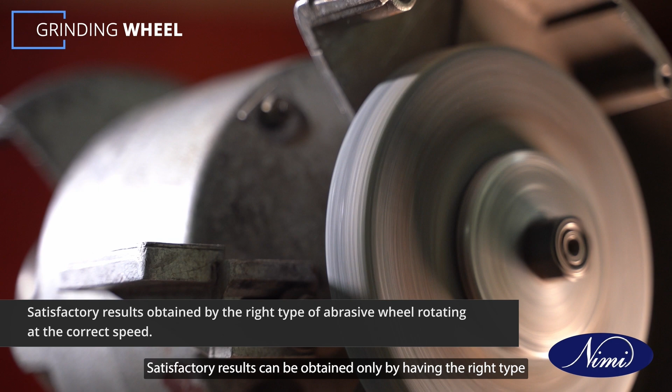Satisfactory results can be obtained only by having the right type of abrasive wheel rotating at the correct speed for the kind of work that is to be ground.

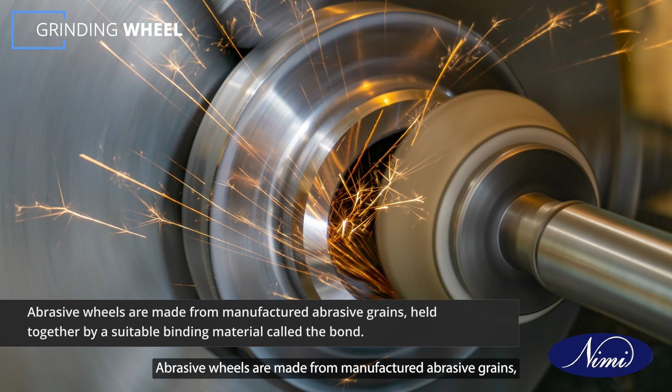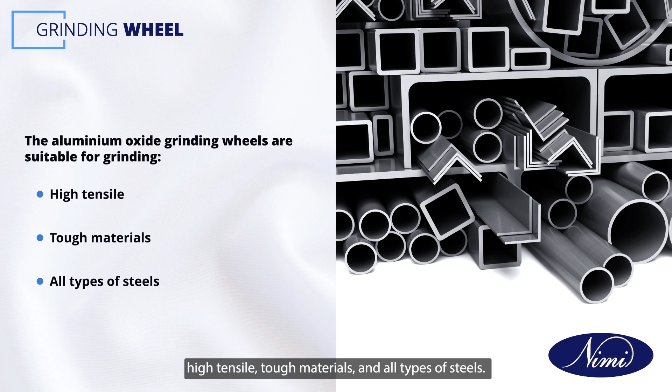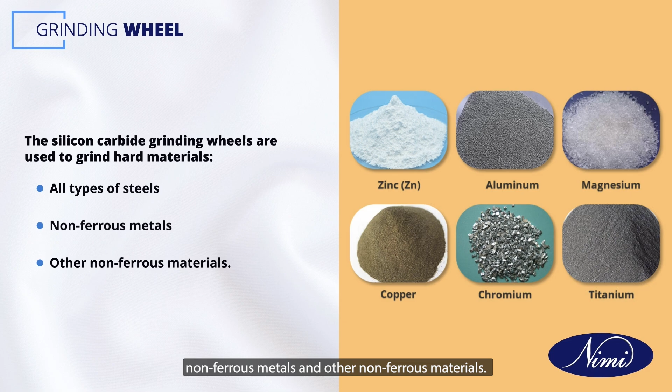Abrasive wheels are made from manufactured abrasive grains held together by a suitable binding material called the bond. The two abrasives used in the manufacture of grinding wheels are aluminum oxide and silicon carbide. Aluminum oxide grinding wheels are suitable for grinding high tensile, tough materials and all types of steels. Silicon carbide grinding wheels are used to grind hard materials such as stone or ceramics, non-ferrous metals and other non-ferrous materials. The type of abrasive is clearly marked on an abrasive wheel by the manufacturer.

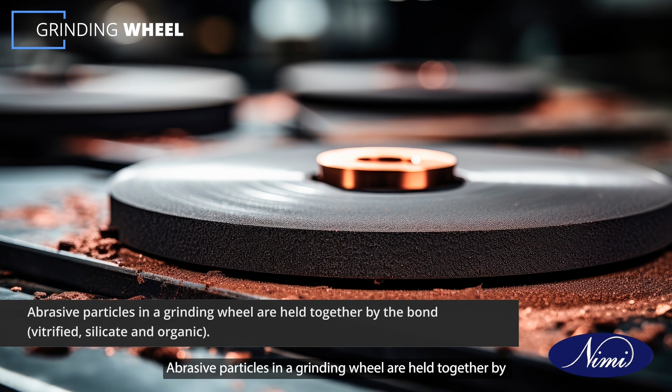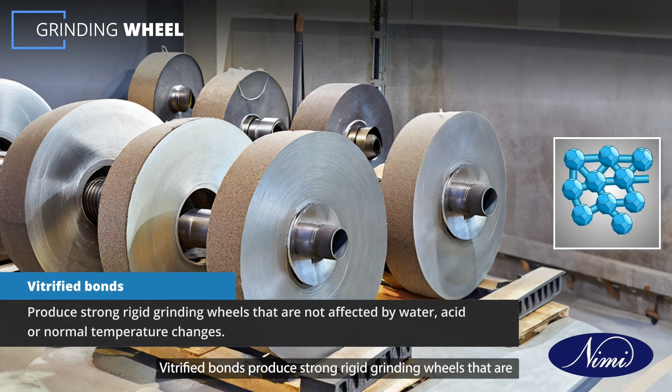Abrasive particles in a grinding wheel are held together by a material called the bond. The bond may be vitrified, silicate and organic. Vitrified bonds produce strong, rigid grinding wheels that are not affected by water, acid or normal temperature changes. Most of the abrasive wheels are produced with vitrified bonds.

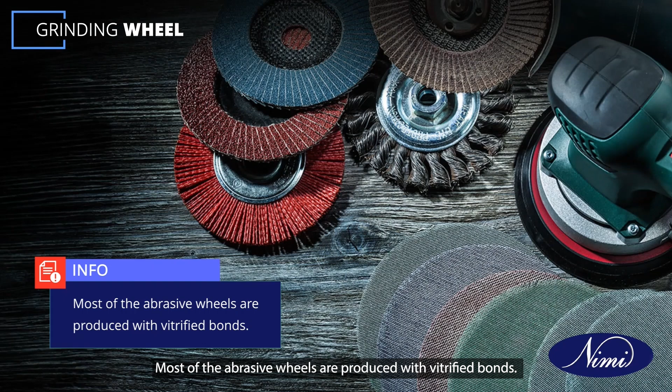A silicate bond produces a wheel with a milder cutting action than a vitrified bonded wheel. Large diameter wheels have a silicate bond.

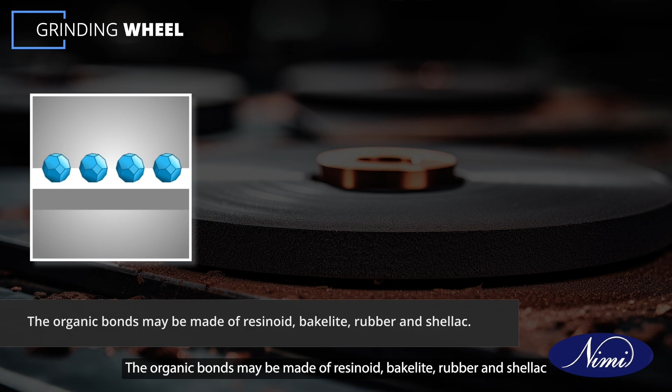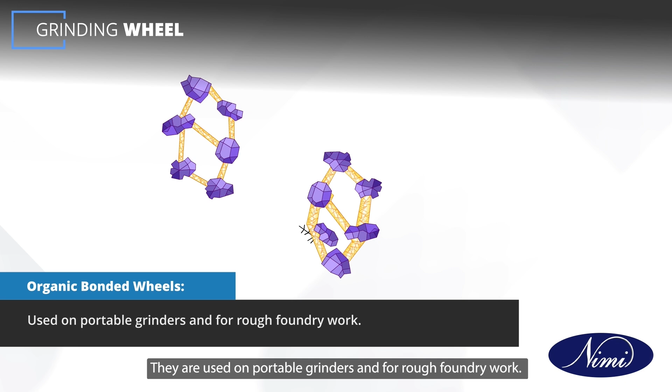The organic bonds may be made of resinoid, bakelite, rubber and shellac. The organic bonded wheels have a safe higher operating speed. They are better able to withstand rough usage. They are used on portable grinders and for rough foundry work. Thin cut-off wheels are made with an organic bond.

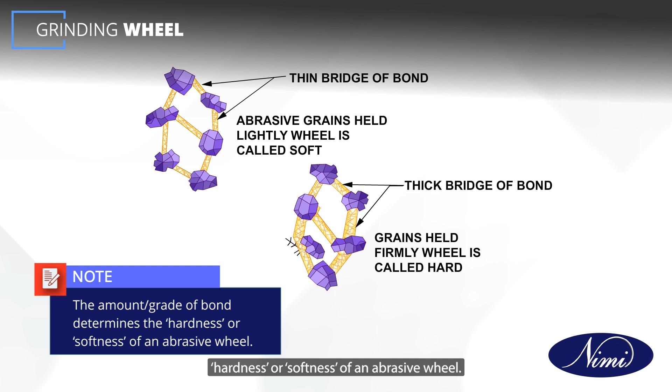It is the amount or grade of bond that determines the hardness or softness of an abrasive wheel. The cutting action of a grinding wheel depends to a large extent on the grade of bond of the wheel. The principle is that the individual abrasive grains are small cutting tools.

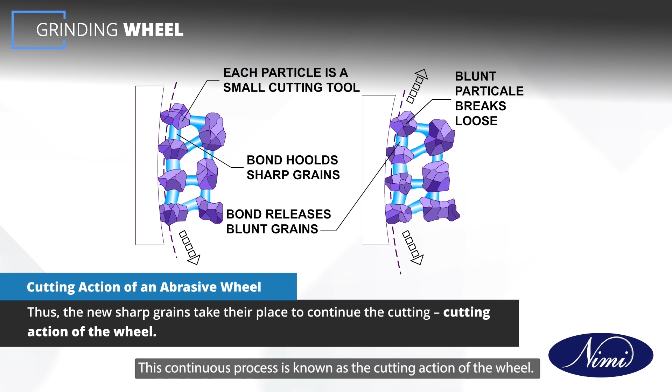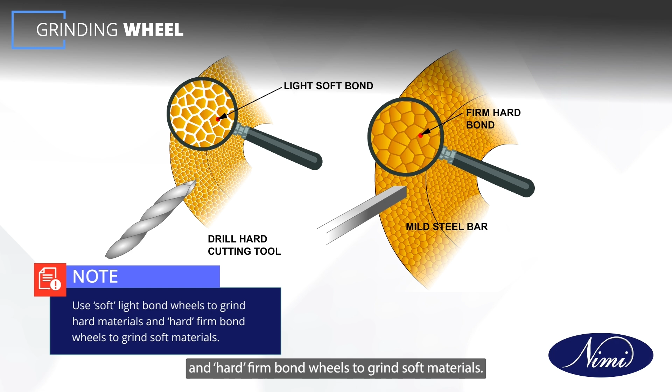The bond must be such that it must hold the grinding particles together when they are sharp and must release them when they become blunt, so that new sharp grains take their place to continue the cutting. This continuous process is known as the cutting action of the wheel. Use soft, light bond wheels to grind hard materials and hard, firm bond wheels to grind soft materials.

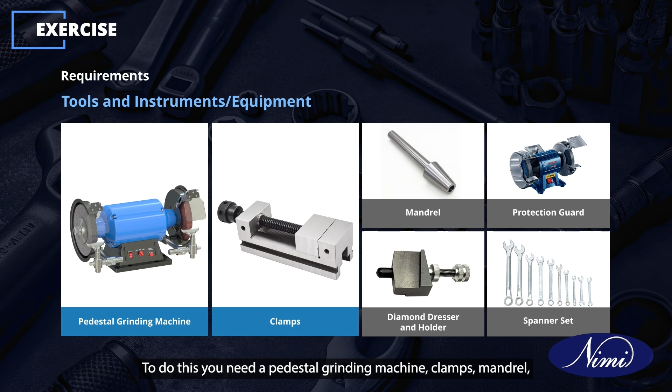Now let us perform a few tasks to test your understanding. To do this, you need a pedestal grinding machine, clamps, mandrel, protection guard, diamond dresser and holder, and spanner set.

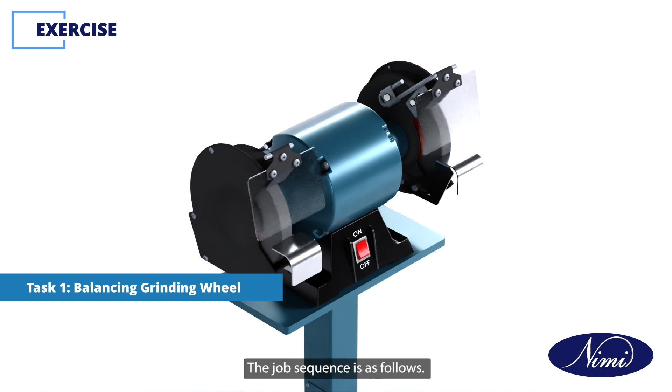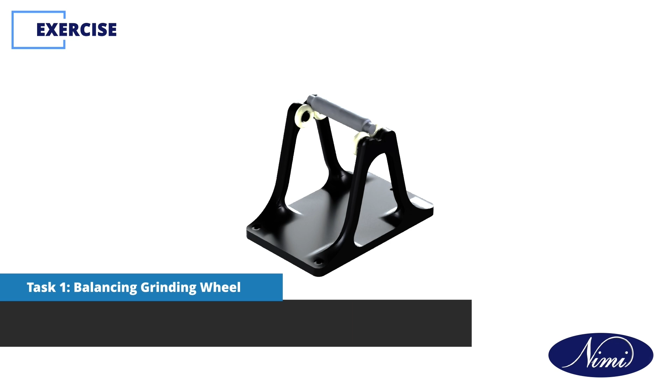The first task is to balance a grinding wheel. The job sequence is as follows: check grinding wheel for cracks by light tapping, unclamp balance weight of grinding wheel, prepare the balancing unit, clean the bore of the unit and the balancing mandrel.

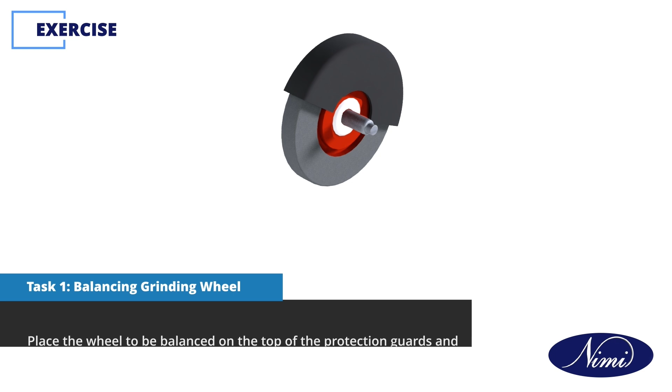Mount the wheel assembly on the mandrel. Fix the protection guard. Place the wheel to be balanced on top of the protection guards and lower gently onto the balancing stand. Rotate the grinding wheel so that it can rotate by itself due to its momentum and rest at a heavy point. Mark the lowest point on the wheel.

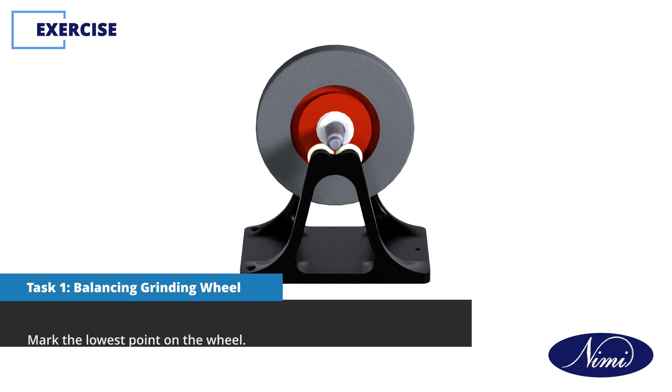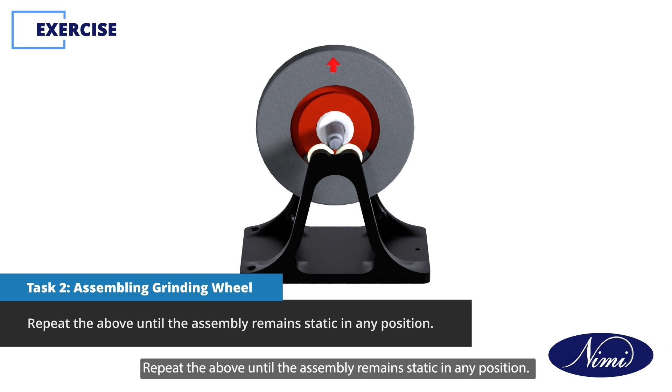Turn to the diametrically opposite point, add balancing weight, moving to the lighter side. Repeat the above until the assembly remains static in any position.

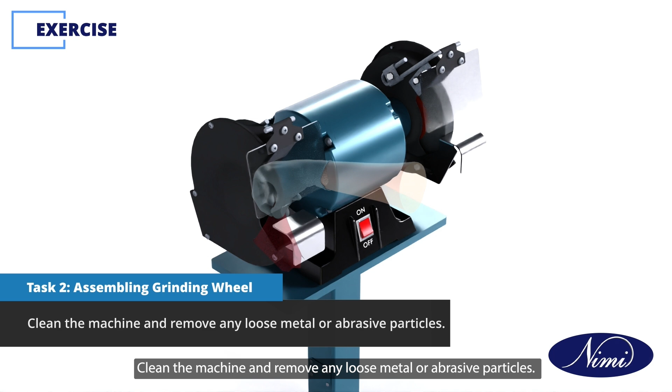To assemble a grinding wheel, the job sequence is as follows: clean the machine and remove any loose metal or abrasive particles, loosen the work rest clamp and remove the rest, remove the outer plate of the wheel guard, check the nut direction before loosening.

Remove the nut and the outer flange. Remove any paper or washer that has adhered to the flange. Clean the flange, spindle, thread, and inside the guard. Push the wheel carefully against the driving flange and place the outer flange in position. Screw up the clamping nut by hand firmly enough to hold the wheel in position.

Turn the spindle and wheel a complete revolution. Ensure that the wheel is running true and it is clear of the inner part of the guard. Tighten the nut sufficiently enough so that the flanges will drive the wheel without slipping and held securely.

Refit the outer plate of the wheel guard. Reset the work rest as close to the wheel face as possible. Tighten the work rest clamp firmly. Rotate the wheel by hand to ensure that the wheel runs freely.

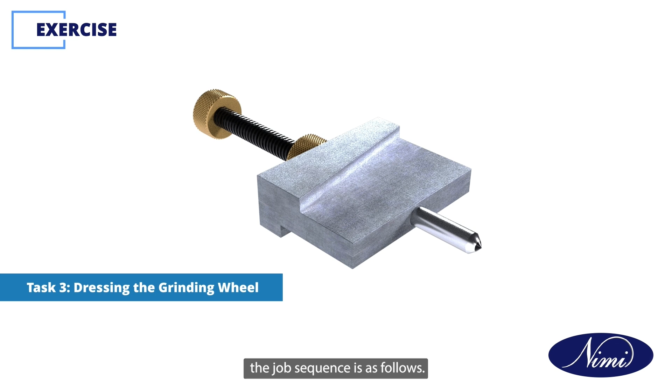The final task is dressing the grinding wheel. The job sequence is as follows: select the diamond dresser and holder, insert the diamond dresser in the holder, mount the holder on the work rest.

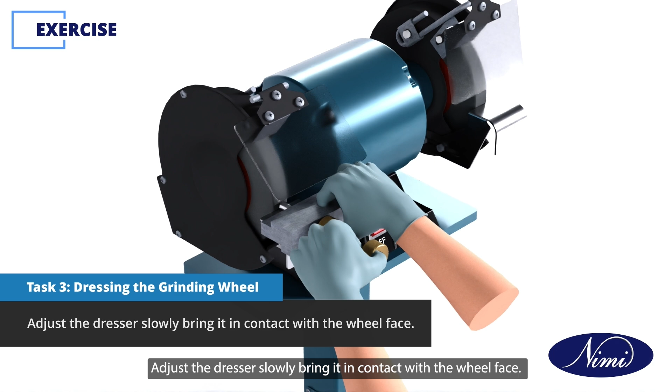Adjust the dresser slowly, bring it in contact with the wheel face. Move the dresser across the wheel face for dressing and truing. The finish of truing obtained depends on the rate at which the dresser is moved across the face.

We have reached the end of this session on balancing, mounting and dressing of grinding wheel pedestal. By now, you should be able to know the grinding wheel, determine balancing of grinding wheel, adjust the clearance between tool rest and grinding wheel, and learn the use of wheel dresser and types.